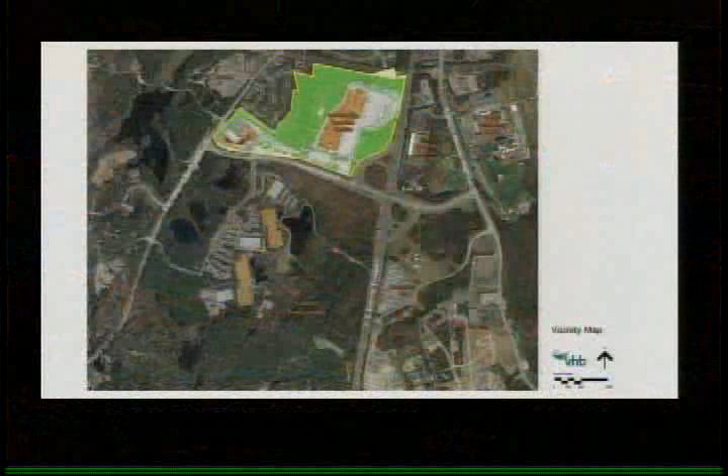I just wanted to give an overview of what the plans are and seek your input. We understand this is completely non-binding, an open discussion of the issues, but we are hoping to address all of the issues that you and the town might have in bringing this project forward. In front of you are hard copies of all these slides, so you don't have to turn around and look at the screen.

Just so everybody knows the property we're talking about, it is the site of Merrimack Premium Outlets. It is an out parcel that was kind of a remainder parcel as part of the original development, and it was programmed for a 200-room hotel and 3 or so family-themed restaurants. That was included in the DOT permitting, the off-site traffic improvements, and also in the discussions with the town and with MVD regarding water supply.

As Tom indicated, he has had multiple discussions with folks in town, including Fidelity Investments and Atrium, or Maquet, I can't remember what they're called. Maquet.

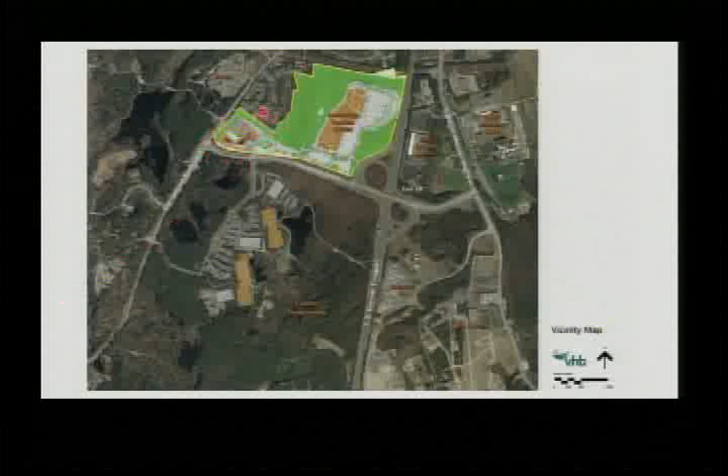You can see from this plan that this particular out parcel - let me see if I can get the laser pointer to work - this is the portion of land we're talking about, and it really is in the center of a huge number of employees and also residents of the town. The major employment base of not only Merrimack, but arguably of this part of New Hampshire, is within a half mile to a mile radius of this site. So giving up that opportunity to do something special just because we had initially conceived it as being something smaller seemed like a real wasted opportunity.

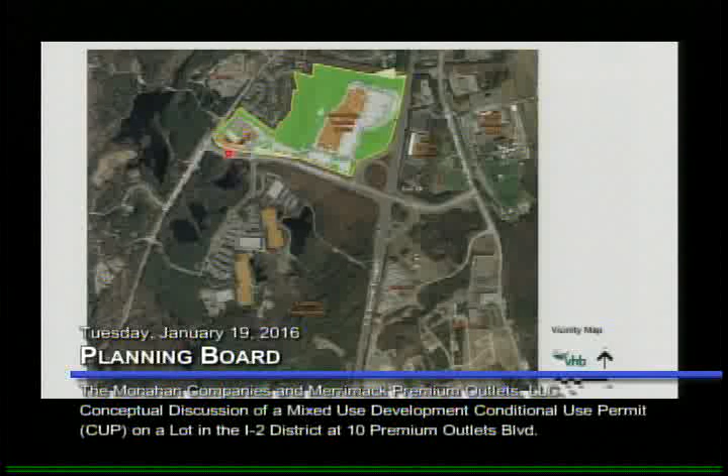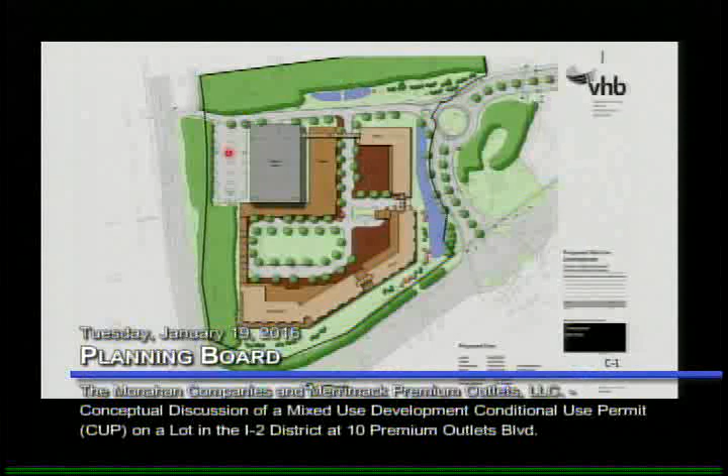So what we are proposing is a mixed-use development, and we had gone to the ZBA, as Jillian indicated, and were successful in gaining relief from your zoning ordinance to allow a mixed-use development under the conditional use permit regulations within the I-2 district. Right now it's only allowed in the I-3 district. Furthermore, we don't have 500 feet of frontage on DW Highway, so that was another variance. The parcel is only 20 acres instead of 50, which was also one of the provisions in the CUP regulations. So all three pieces of relief were granted by the ZBA in November of last year.

So what we are proposing is a development that includes the hotel, but also includes some residential use - I'll get into specific numbers in a moment - some office use, and retail and restaurant uses. Many of these uses would be allowed as of right in the I-2 district, but having them on a site together does a couple of things: it reduces the peak traffic flows because you have shared trips, and reduces the overall demand for parking because you have shared parking space use.

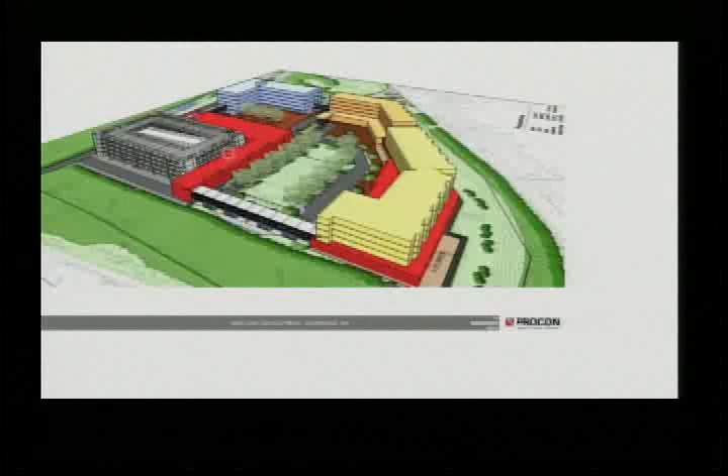And the other thing that I'll mention now that is an important feature of this is that we need to figure out a way that we can phase this. So it's unlikely that this is all going to be built at the same magic moment, because we need to have sort of tenants or customers to occupy these spaces, or we're not going to be able to finance the deal. So there's going to be kind of a dance, and this is likely to be built over, I'd say, a 5 to 7 year period.

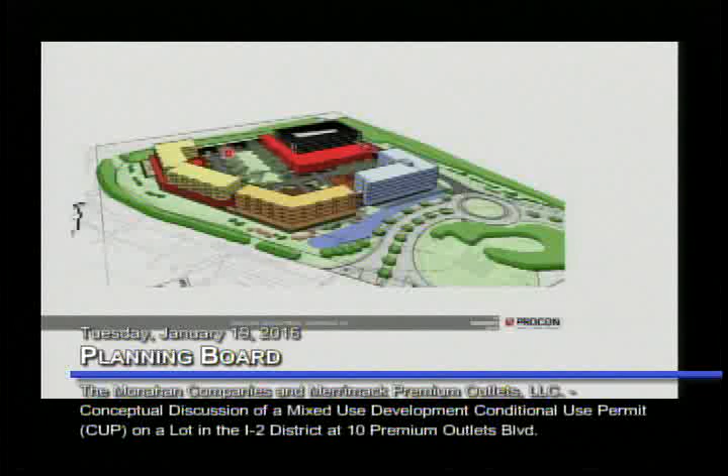This is another view from sort of an aerial view from the Industrial Drive, Spartan Way, Premium Outlets Boulevard direction. And then this is as if you were probably sitting on top of the cell tower on the top of the hill. So this is looking back toward the intersection of Continental and Industrial.

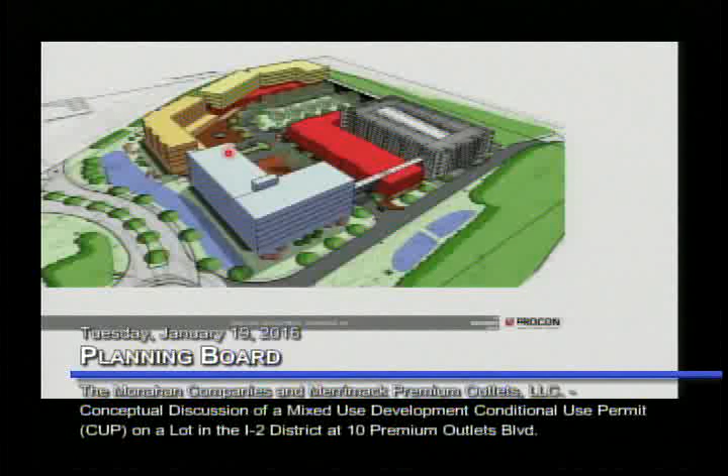At a glance, the program is for 165,000 square feet of office, and these are, at this point, I would characterize them as working numbers - we haven't really nailed these down to any great degree. But 165,000 square feet of office, 100,000 square feet of retail and restaurant use, probably something like an 80-20 split retail to restaurant, a 120-room hotel, and 180 bedrooms for the residential. And as I said, that will likely be a mix of 1 and 2 bedroom units.

And as I indicated, it's likely to be phased in some way. So when you go through those numbers and you look at the town's parking requirements, you come up with something on the order of 1,530 spaces required. But what we have done - and this is highly dependent on what the exact numbers of the final plan are - there is a methodology that is pretty well accepted. It's been around for about 20 years. This was shared parking, based on a series of studies done by the Urban Land Institute.

What they did was go around and look at actual parking utilization from different kinds of land uses within these mixed-use development scenarios. So they have very detailed parking accumulation rates for every hour. You have a peak demand, and then a percentage of peak demand that might be occupied during any given hour of the day.

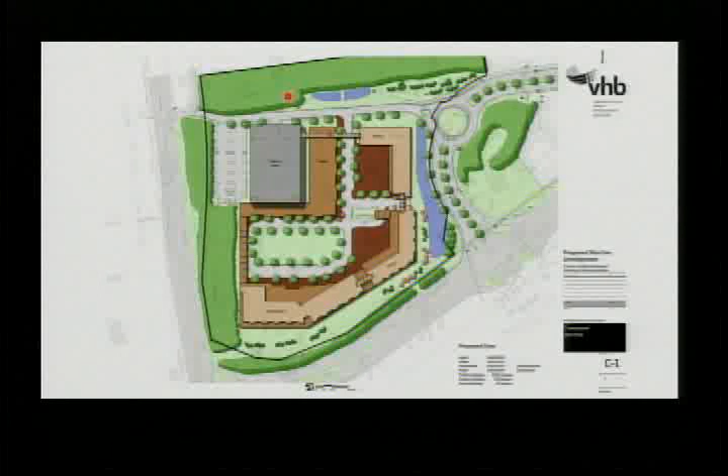So for tonight, you don't hate it, but don't love it? Oh, I think it's kind of a classy place, I always have. And I do understand, I think it's very dense. I have a problem with that. I agree with you in terms of the landscaping. It's a lot of building, but those are issues you guys have to take care of. I think conceptually, it's not a problem.

The density is an interesting point to bring up because there is such a disparity between what different generations look for. I like where I live, where I have an acre, and then there's some land around me, and maybe a little bit more. And maybe if I could someday upgrade that to 5 acres, that'd be okay too. But like Lynn says, there's a whole generation of folks who really want to be across the hall from their friends. And I grew up in the city, so I do understand both, so thank you for that.

So, any questions? I'm glad that the sidewalks have come into play, and I'm very happy Mr. Mills is happy with the Rotary. As soon as I saw that, I knew you were going to be pleased with that.

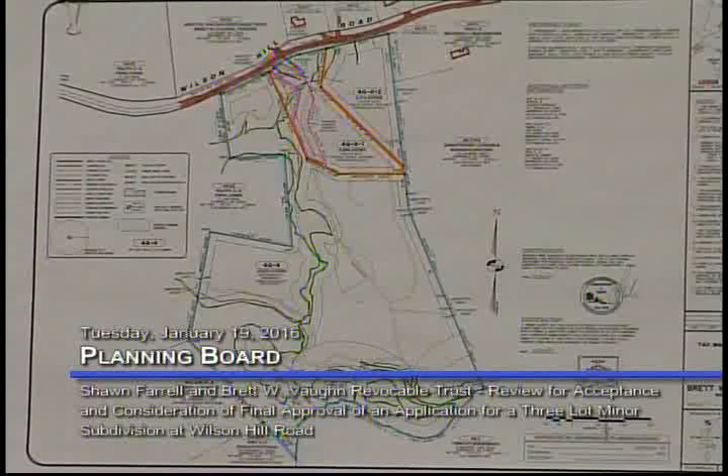It is the desire of the applicant to have private driveways because he plans on residing on the large lot, the 22-plus acre lot. Privacy and security is a huge thing, and it has an impact on lots being marketable. Also, common driveways have a purpose, but at the same time they have never-ending shared responsibilities, and sometimes those arrangements don't work out. Sometimes your relationships with abutters are better if you can have your own access and privacy, and that is what we are seeking this evening.

We believe we put a plan together that meets all of your criteria and regulations. The driveway curb cuts will satisfy sight distance requirements, so they'll be safe. The additional wetlands we're proposing to impact, 683 square feet, we believe are very reasonable as far as impact goes. We've had our wetland scientist delineate the wetland boundaries. He also presented the application before the Conservation Commission and stated that the wetlands in this area are not of high value.

Also, if we did design a common driveway, there would still be wetland impacts required because the existing crossing is not adequate in size. It would have to be substantially wider to meet common driveway standards, so we'd be looking at potentially very negligible differences in wetland impacts. But I don't want to speak in that direction too much, Mr. Chairman, because the desire here is to have separate, distinct, private driveways for this subdivision.

So with that, I'd be happy to answer any questions you may have. I did go over the staff memo. We do not have any problems with any of the conditions that were outlined, with the exception of the one pertaining to the shared driveway.

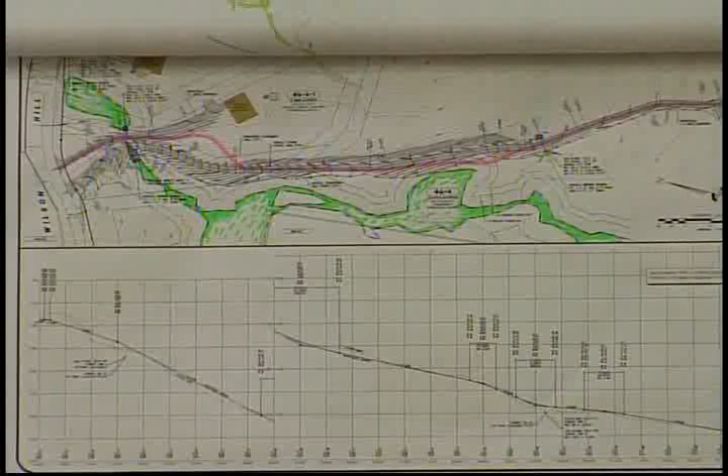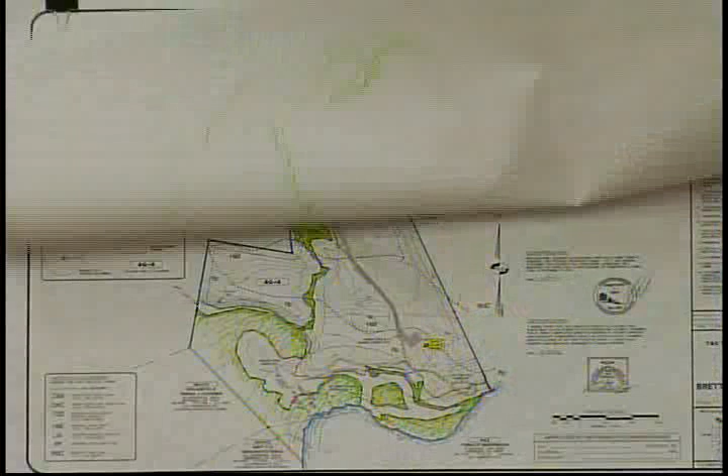Thank you for that. Are there other comments or questions you'd like? No, that's for the board. I just wanted to bring that up, that it was a concern, and we did discuss it at the zoning meeting. Okay, we'll offer the applicant the opportunity to address your concerns here in a second. So, any other comments? Thank you so much for your testimony.

Are you here for support, or are you separate? Well, no, I was just saying the only thing we were worried about was the water drainage out of that area at the bottom, they call it the wet area in your tax map.

You got to come up and get to a microphone, I don't mean to be picky about that. The folks at home just can't hear it when you do it that way. No, she's right. Whatever she said, that's it.

Terrific, thanks. Chad, what do we know about the water under Wilson Hill Road and how it's working today versus how it could work going forward? Sure. So currently there's a 12-inch culvert that goes under Wilson Hill Road in this location, and then it travels through the jurisdictional wetland area down to our proposed crossing, where we're installing a 15-inch corrugated plastic pipe. The 12-inch pipe, I believe, is a corrugated metal pipe that goes under Wilson Hill Road, so that has a substantially smaller capacity.

There is at least 6 feet in elevation difference between the Wilson Hill Road culvert and the inlet of our proposed culvert, so we do not anticipate that there'll be any issues. Obviously, we're proposing that culvert get reinstalled because we are making it longer, and we are proposing a head wall on the inlet side. That helps prevent blockage of the pipe and allows for the stormwater to get into the pipe in a better fashion.

I appreciate it, I'm sorry for dragging you up here, but take a second to sign in. The leaves come through that 12-inch pipe and back up on the other side of the road in the subdivision we're talking about. But I think if you put in the 15-inch pipes a little further down, that's going to provide more flow through there, and it won't back up as much on that side of the road.

That area is pocketed, you know what I mean? It pockets on the other side of the road. So what happens is the tree branches and everything get built down there, and then all the leaves come through and build a pocket. Then all the water backs up. That area in front of my house becomes a mosquito problem.

In the summertime, if I don't keep the water flowing out of there, it becomes a mosquito breeding ground. That area probably gets about 12 inches deep at times, maybe a little deeper. So it settles down, and then travels underneath my driveway. My next door neighbors and I get all the runoff coming from the hill, comes down around my house on either side, and they merge and come to that area.

Where the road is, it pitches straight up and goes underneath the road straight. When we get to the other side, all the debris that builds up through time forms a pocket, and then the water rises on the other side. We've had the water on the other side as deep as my knee in that area. So what I don't want is building a dam out there that causes that water to get any deeper.

That makes sense, although I think if those houses are built across there, the fact that they're going to be concerned about losing their front lawn means they'll be interested in keeping that water flowing through the pipe. I just want to make sure that it stays flowing out of there, because I don't want that water to back up anymore.

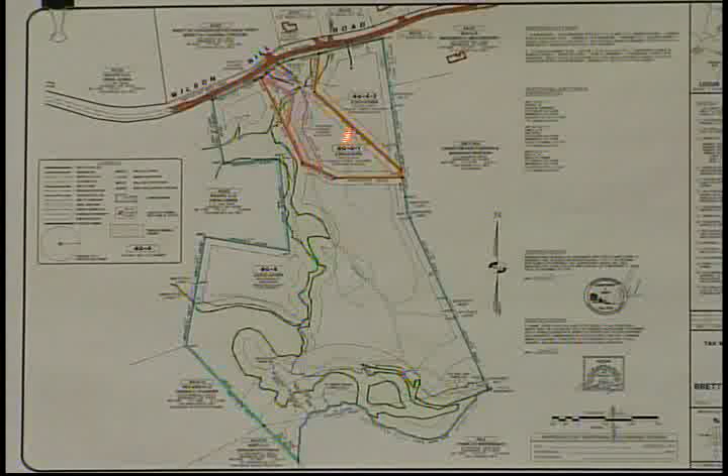I can only speak to what I think I've heard, but I can explain our design, and then maybe touch on what I suspect might be happening. The invert out of the corrugated metal pipe under Wilson Hill Road is 6 feet higher than our culvert location. So I don't think the problem has anything to do with our existing culvert.

I think it's localized. There's probably a low spot on the inside of that jurisdictional wetland area where water will impound during a storm event. If there's washout from leaves that comes through here, or debris inside that wetland area, maybe it will back up through the culvert under Wilson Hill Road at that time. But it has nothing to do with anything that we're doing; we're certainly not going to make that condition any worse, because we've sized the culvert appropriately.

I think the Chairman's also touched on what's likely to happen: when that becomes somebody's front yard, it will be maintained and manicured better than it is today. Best you can, given it's a wetland and you can't mow it. Right, exactly. I can only envision this being better. Certainly not worse.

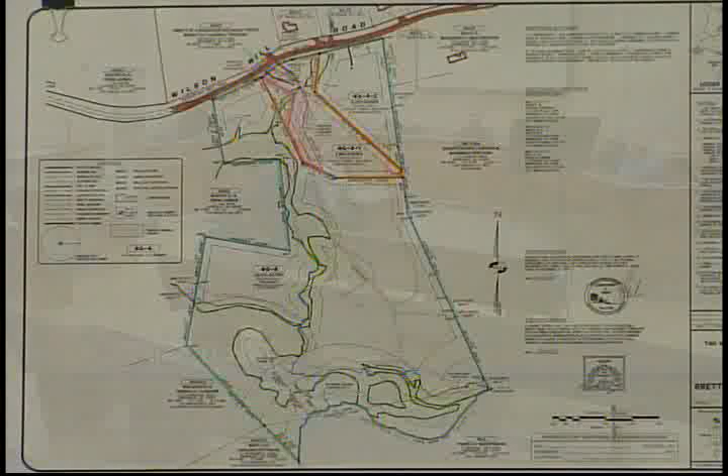We're not creating any impoundments. We're not utilizing the wetland areas for detention or impounding water at all. We've designed a free flow condition, proposing to install a culvert at the low point, so any storm water that comes through will free flow and be diverted downstream toward the river.

All right, thank you for that, Chad. Seeing nobody else in the room to testify, I close the public hearing. Is there any general discussion or questions for the applicant by the board?

Nelson: I would just like our Public Works to become aware of this and have them look at it. At what specifically? The water, this drainage situation. I think he may make some recommendations that would alleviate this issue. He must be aware of it, or he should be made aware of it from what I'm hearing.

Okay, Robert or Jillian, do you have suggestions as to how we communicate that to Public Works in the context of an applicant who wants final action tonight? We can certainly make Kyle aware of that as a staff recommendation. Not sure it needs to be part of the motion. Does that work? Good.

Other comments or questions? What's the will of the board with respect to final disposition of the application?